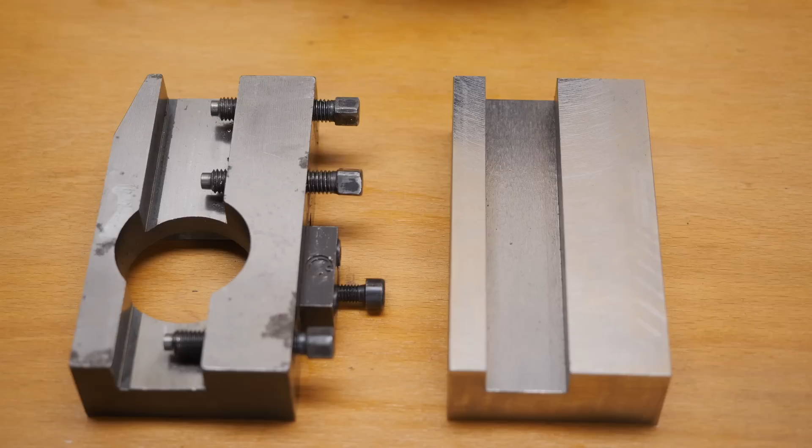A couple of the tool holders which I'm making need big holes in them. Now they're not super critical, so I could just spiral mill them. And from the size, I could also just bore them with my existing import boring tool.

But wait, what's this? This Narex VHU80 needs a 40 taper shank. I've got a slug of steel to make the shank, and I've also got a bar to make the differential stud to pull them together. So I think I'll make the stud first.

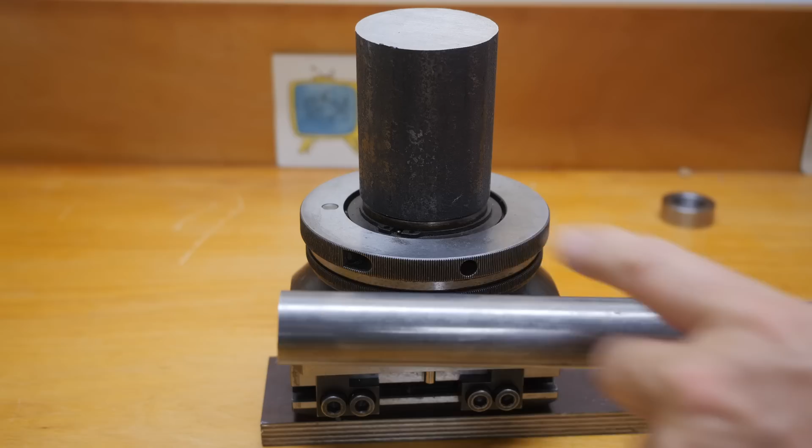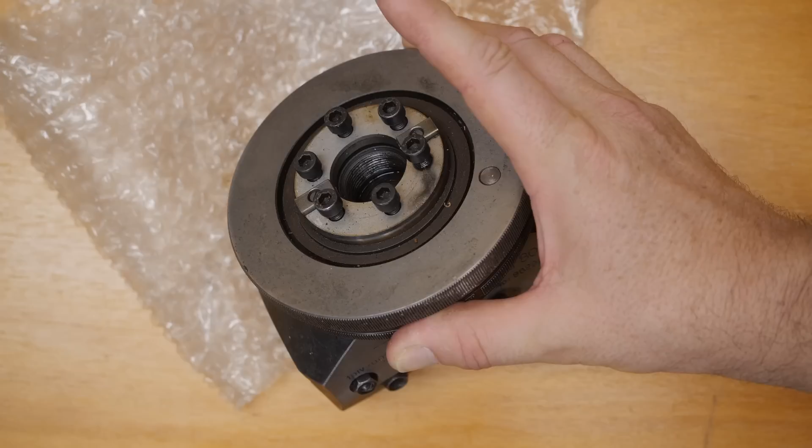Mail time. Man, what have we got here? Well, I thought you could do with a decent boring head. Ah, man, this is fantastic. So this is one of those Wohlhaupter style boring and facing heads. It's called the VHU80. It originally had a Morse taper shank on it, so I'm going to have to make up the 40 taper shank, but luckily they were designed to have replaceable shanks, so that's going to be easy enough.

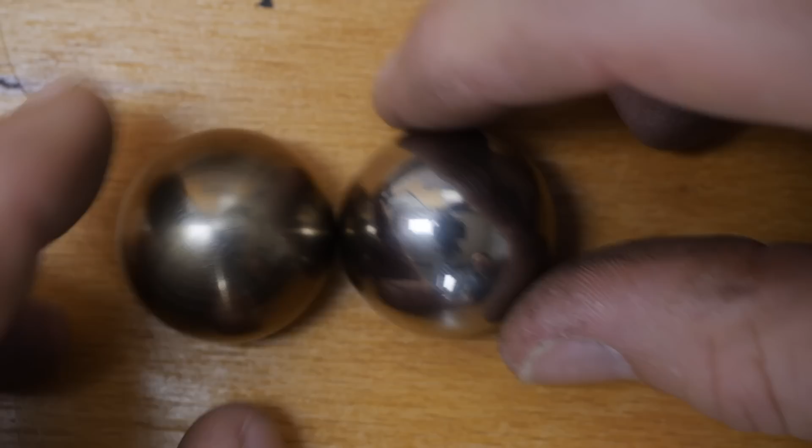Oh, nice. So when I was down in Malta, I saw that Luke was using these ball bearings drilled out with a magnet put in it. It helps keep things square in the vise, really. So for something like a cast part or something that's a bit rough, just magnet this onto the vise and it gives you a single point of contact to press against the part.

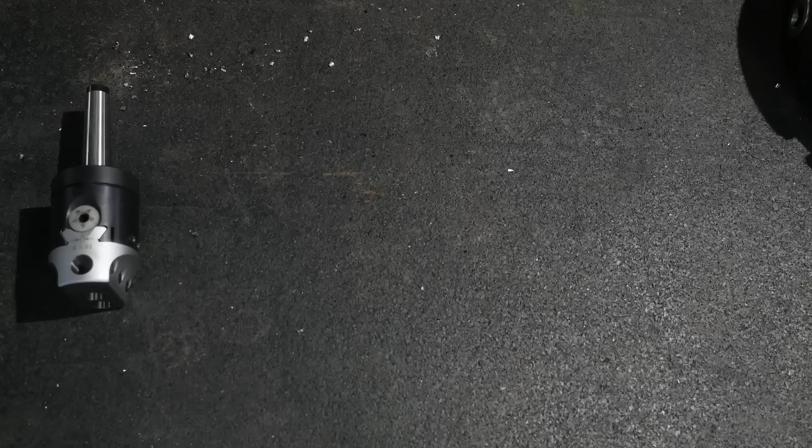Thanks a lot. I really do appreciate that Luke sent me this facing and boring head, because he's already got a Wohlhaupter and a D'Andrea, which are the most sought after versions of this.

Now, seeing as it was made in Czechoslovakia, that kind of reminds me of my favourite Sopranos scene. I'll leave a link.

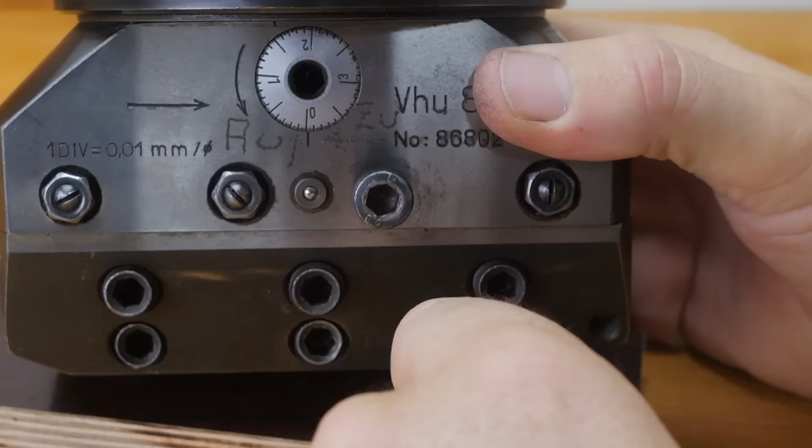And Czechoslovakia hasn't been a thing since 1993. It's got to be at least 31 years old. There's no obvious damage to it. There's only very, very mild signs of a bit of staining or light corrosion on it. You can see no obvious scratches or gouges in the corner where it might have hit anything. And apart from somebody writing some notes in it with a vibro pen, German for open and close, it really is in great shape.

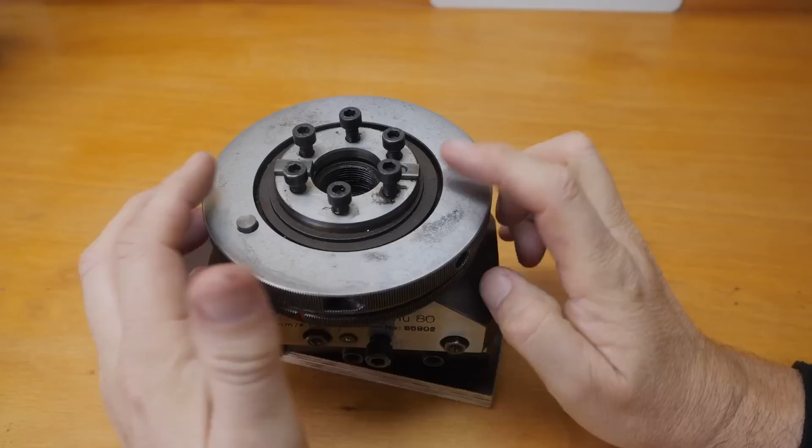The manufacturer, Narex, is still around. They've got a very good website with very clear access to the manuals and spare parts catalogue and all that sort of stuff, which is great. I'm obviously going to have to build a 40 taper shank for it. The way Narex mounts it is with this bolt pattern. They mount a flange, and then on top of that flange they mount the 40 taper, but with a much extended skirt of 110mm diameter with 4 bolts through into that intermediate flange.

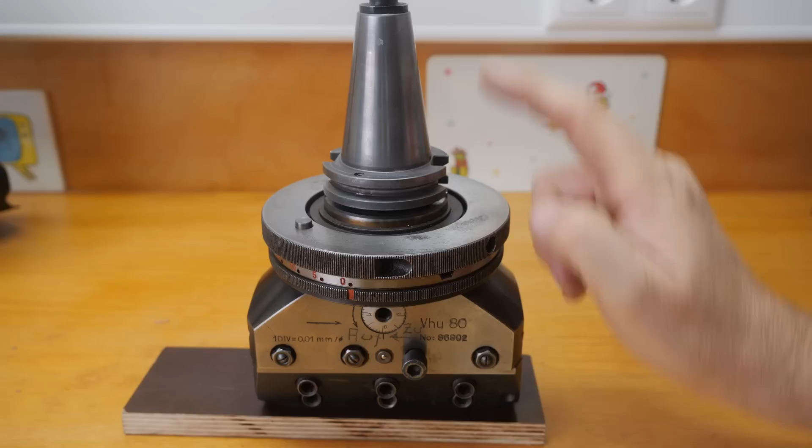And at first that was what I was going to do as well. But then Luke pointed out there's a thread in here. And he'd obviously been watching videos. Wohlhaupter mounted their tapered shanks by using an internal thread. And since you can never have too much clearance vertically on a mill, it's really quite attractive to make up a 40 taper shank that mounts like Wohlhaupter does.

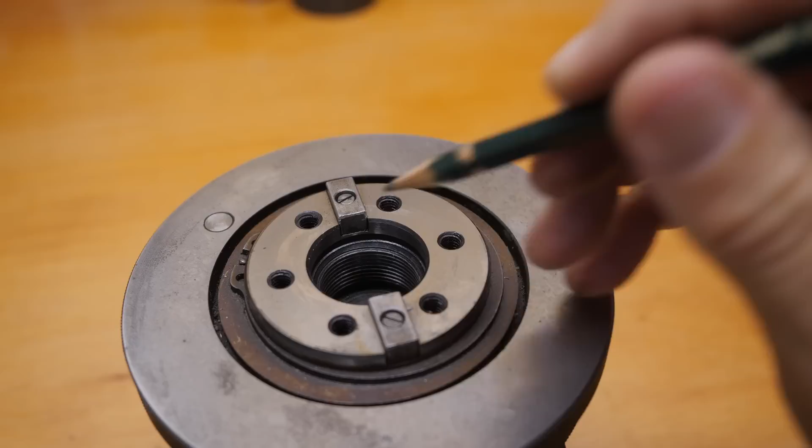To do that, because you can't screw it all the way down with the keys, I'll have to use a differential screw. Wohlhaupter used 16mm thread on one end and maybe a 20mm on the other, something like that, with 1.5mm pitch and 2.5mm, giving the 1mm differential pitch. So I'll use the same. You can see there's a centering boss here that I want to use. And just make up the 40 taper spindle, taking the normal pull studs on the one end with an M28 by 2.5 non-standard thread on this end to match up with that differential stud.

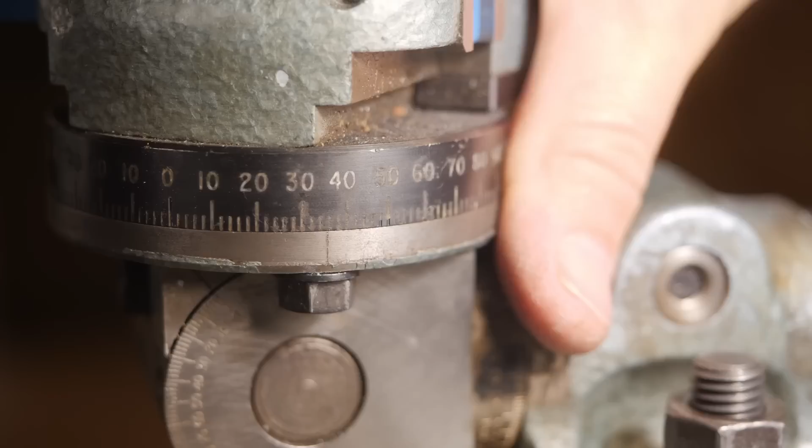I'll cut the threads with this brazed carbide lathe tool, but it's got a nasty chip out of it from its last use, so let's go and sharpen it. About 7 degrees should be enough. Now, grinding carbide is supposed to be really bad for you, the dust, so shop vac.

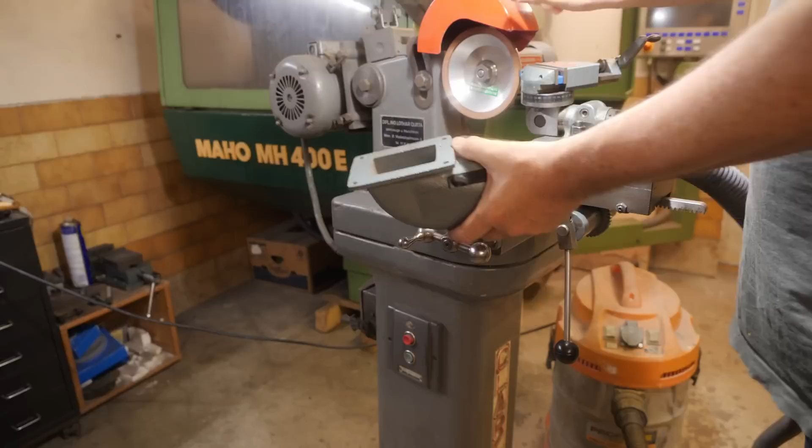I had been taping this hose to sort of a funnely thing, but I've decided to 3D print something, be a little more permanent, a little easier to use. So this should tide me over until I've got my new dust collecting wheel guard finished. And even with the shop vac, I also wear a dust mask.

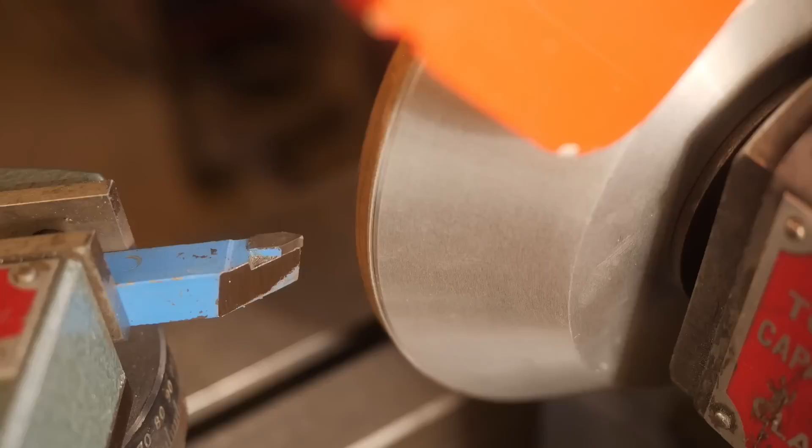Nope, that tip's still not quite there. Got one of these sort of diamond hones, so I'll just give it a little bit of a dressing up with that. And just also round the tip just a little bit. So what's that now look like?

So these are like the original ground sides as they came from the manufacturer. How does that radius on the nose look? Looks like I've broken it a little bit. And then the side I reground. Got a wee bit of a facet going on there. I think that'll be fine.

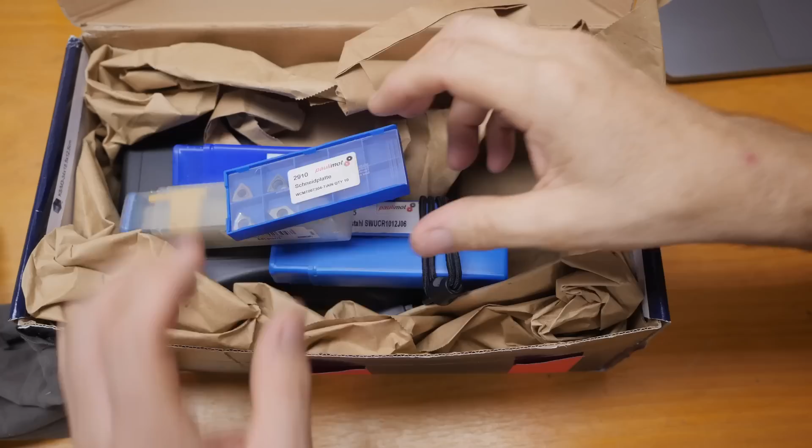Mail time. Alright, rags. Excellent. I didn't have enough rags. Oh, wait. There's more than rags. Excellent. So after Christian gave me some CBN inserts and I used them to turn down some high-speed steel, he said he found another one with a smaller nose radius and sent me that to try out as well. And also, it looks like some of those, what are those, W shapes? Don't have any holders for them, but what do we got here?

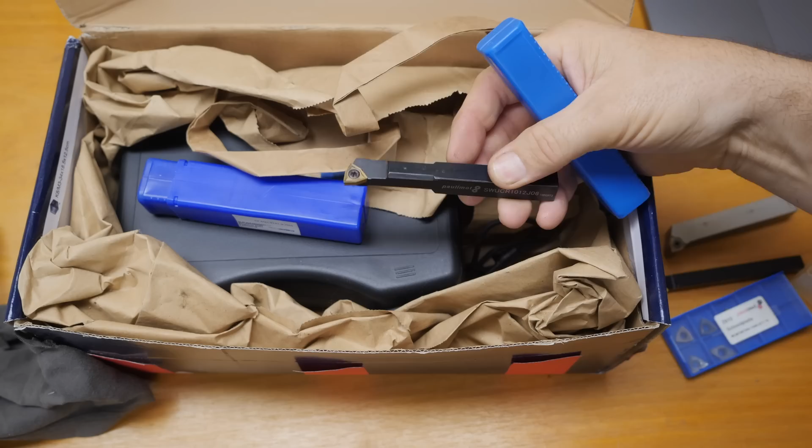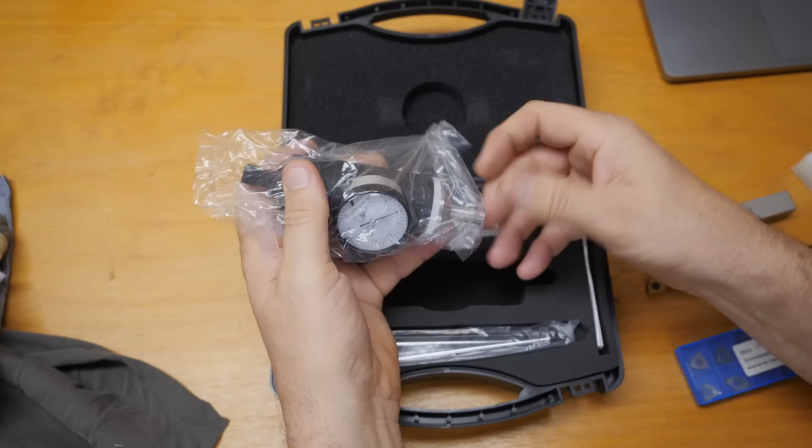All right. Brilliant. And the matching boring bar. Thank you very much. A similar, slightly heavier boring bar. A 2-insert end mill. But the star of the show, he somehow managed to end up with 2 of these centrifugators, or whatever they're called. Center finders. And offered to send me one. And I've never tried one of these out, so I really appreciate it. So these ones you can just hold the tool steady and run the tip right around to sweep a bore and therefore touch off. Thank you very much, Christian.

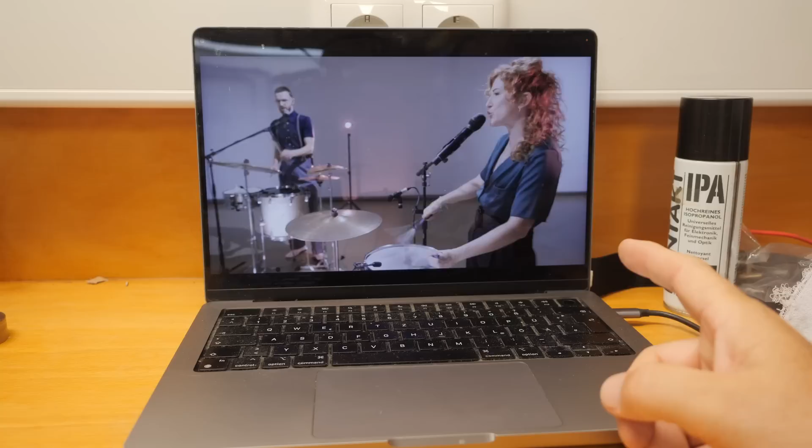That's brilliant. Got positive feedback on using swing music in my last week's video. That was inspired by seeing Marina and the Kats opening for Calexico. I really like the setup with splitting the drum kit between the lead singer and the drummer so that the two of them are sort of both on the kit at the same time. It's a very cool groove they've got.

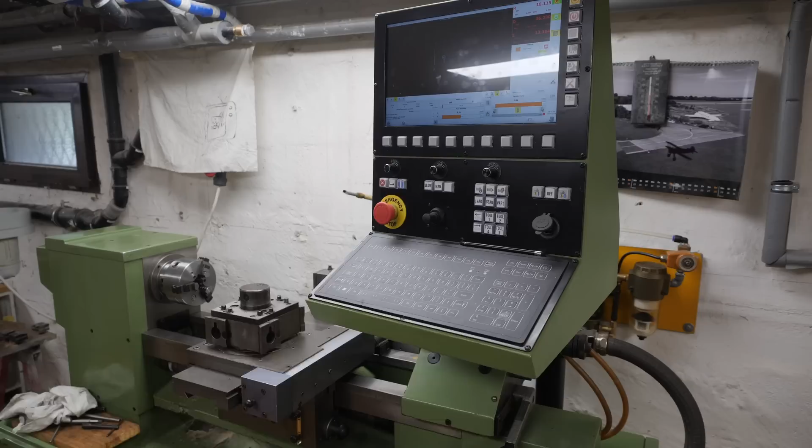Right, let's go to the lathe. So this is a 30mm bar. It would fit through the spindle of my lathe, but the lathe's currently got the collet closer in it. So let's pull the collet closer. Luckily that's also really easy on this lathe. Simple as that.

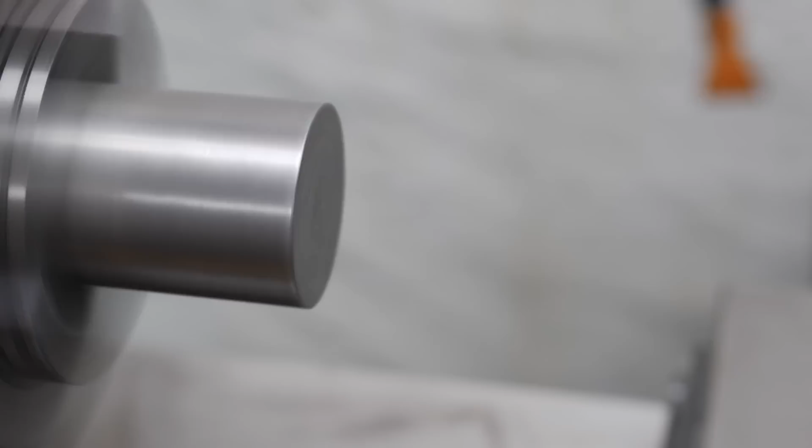Okay, so this here is 30mm bar. If I just chuck it up, it turns pretty straight. This is a very nice 3-jaw chuck. But when I inserted it right through the spindle bore, I got a lot of run out. And I could see here that with it lightly chucked up, this jaw is not gripping. Inside the spindle, there's a key, which this slots into, to prevent rotation of the collets while they're being tightened up. And that key is what stops the 30mm stock going right through.

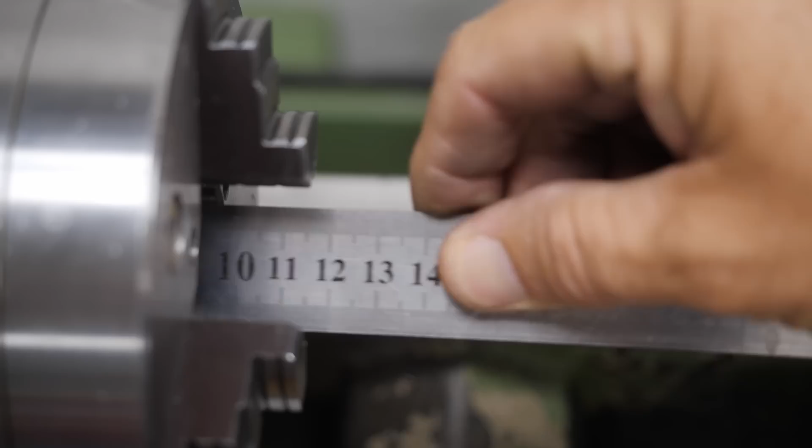Right, it's not a real deal breaker because I've got about 120mm to that key. And I'd already started designing another tool, which I needed 120mm offcut. So I'll just chop this once at 180. The stud I'm making is going to be 60 long. And then once that's parted off, the rest can be used for my next tool.

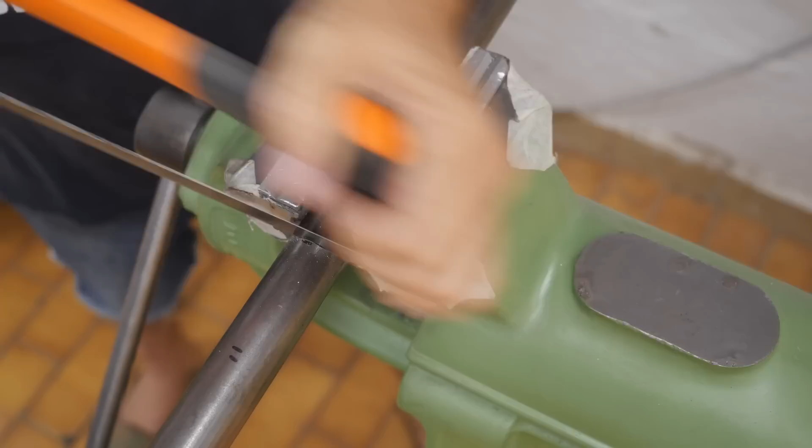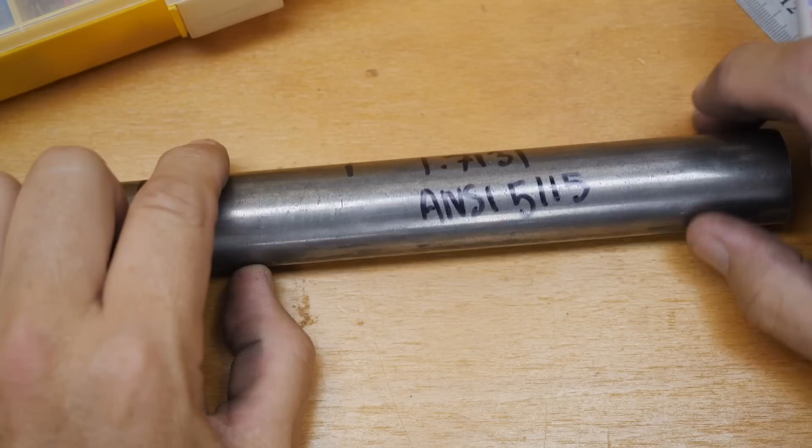You might be wondering what sort of steel I bought. It's EC80. That's also known as 16MnCr5, 1.7131. And in the ANSI world, they call it 5115. So this is a steel that's designed for case hardening. I don't know if I will case harden them, but if I do, at least I got the right steel for it.

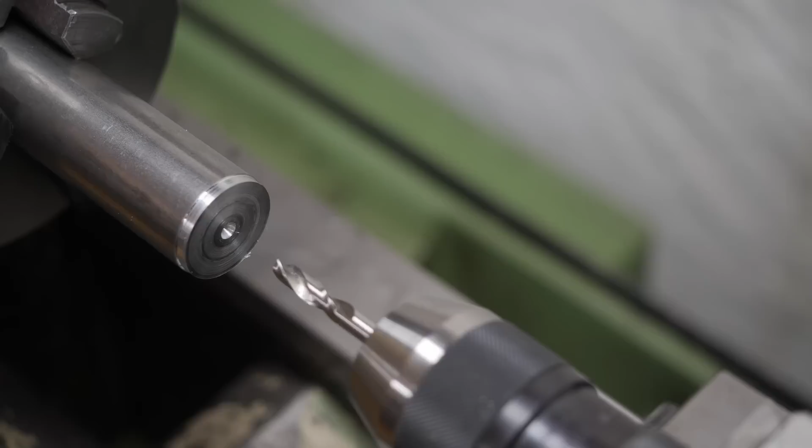Now the first thing I'm going to do here is put the hex into the end of it. So first I'll center drill. I probably should have ground a flat on this for wrenching, but I don't think the rotational loads are that high. Man, that fit is awesome. This is the surface I hard turned in a previous video. It's a high-speed steel.

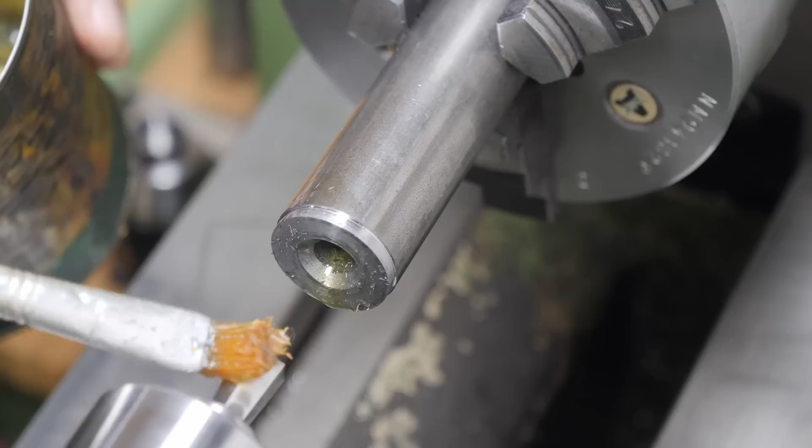Okay, so now we're coming to the bit that's caused me a lot of issues in the past, rotary broaching. This is a pretty large broach, a 10.2mm broach for a 10mm Allen key. Luckily, being a 6-point, the individual points are not quite as much material to remove. I've had problems in the past when doing square broached holes where the corners are just so far out, you have to remove so much metal that I get into trouble. But let's see if this works.

How does it look after the first couple of millimeters? Well, so far so good. I've still got the corners on my broach. Yep, still cutting nicely. That's about 4mm in. I want to go in about 10. And it looks like my broach still has its nice sharp cutting corners.

Okay, well that looks like it went easy enough. It is reasonably loose, but we've gone in a decent depth. Seems to be cut nicely. So let's call that a day. Start doing the threads.

There's very, very slight dulling of the corners, but I got a feeling that I might not have quite caught them when I dished the end, so that might not be anything new.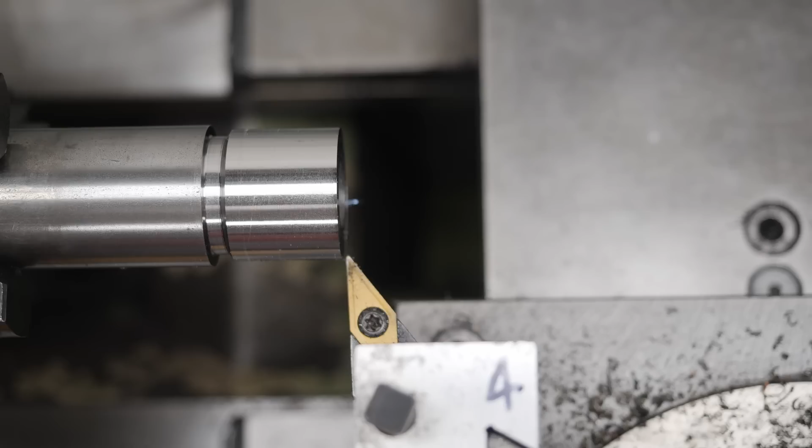So, where was I? Ah yeah, turning the differential screw. So I've already made up a gauge just to test this thread once I've done it. This end's actually going to get a smaller thread, the 24mm 1.5 pitch, but I'll just do this thread on it first just to dial in this tool, since I've set it for the first time.

The reason I switched to this tool instead of inserts is because I then want to do the second thread in the same setup, and this way I can sort of reach in behind the alignment boss here and cut both threads.

I put the wrong Z dimension in, so I stopped a millimeter too short. I have to recut that, and it's a bit too tight, so let me just reduce that diameter a little. Okay, it's not the greatest tool, it's a bit rough there. I'll just give it a good wire brushing.

Yeah, I definitely get nicer, smoother threads with the threading insert rather than with the brazed tool carbide cutter, but hey, it'll work. Right. Just offer up the real one. Oh, that's looking great. Okay, with that dialed in, I can now just turn this thread back off.

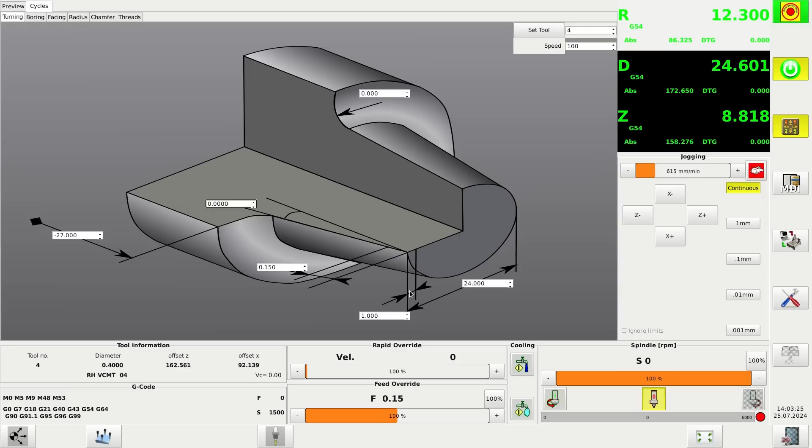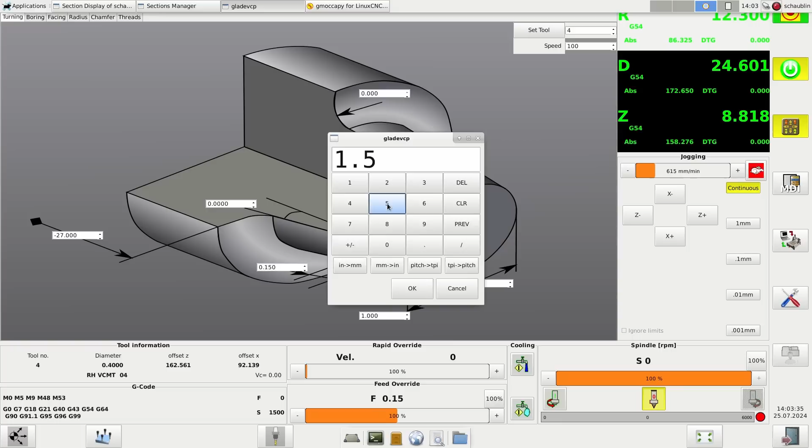Okay, that was done. I thought I was adding an end radius, which would be up here, but I wasn't. I put a taper on, so let's clear that. Don't want a taper, let's put a radius on there, which I don't really need for this first part, but I want to see what it looks like. I'll need the radius then when I do the thread undercut. I really love CNC for those blended radius moves.

This coarse thread really takes quite a large number of passes to cut, but that's what CNC's for. So it's looking pretty rough as I expected, so I'll just run the toolpath again to try and clean it up a little.

Next I need to make a relief groove here. I've just realised that although I've got a bunch of different right hand turning tools, I don't actually have a left hand turning tool, which is what I would need to cut that relief groove with the radius in the right place. So I think I'll just do it with a parting tool, and there won't be a radius on it, but oh well.

There's really quite a pucker factor when you're working this close to the chuck. Just double check, I want to head to minus 63. I'm currently at minus 38, 39. Okay, that's correct.

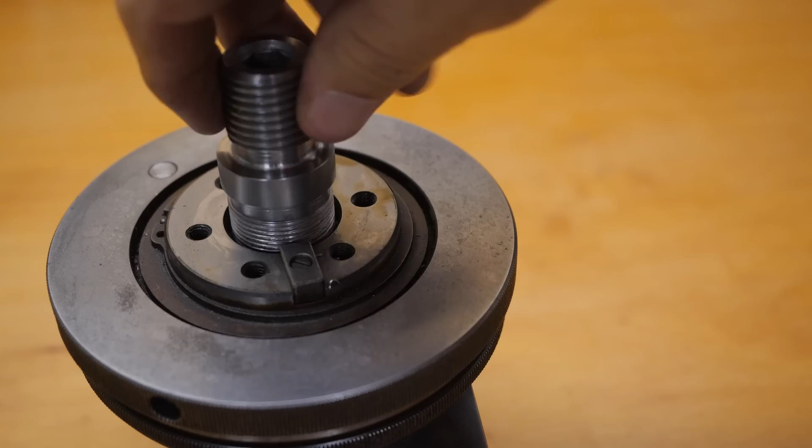Right, does it work? Alright. I wonder if this is how Mr. Whitworth felt the first time he took a bolt out of assembly A and put it into assembly B and it fit. Woohoo! So it's bottoming here. I'm going to need to turn it out 2.5. That's 1.5 turns. And you can see that the alignment boss is no longer down in its bore, so I need to shorten the whole thing.

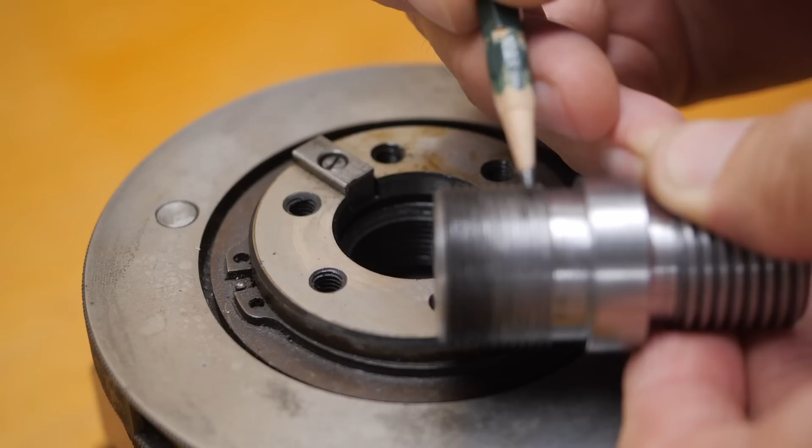My understanding is you only need 6 full threads of engagement, so 1, 2, 3, 4, 5, 6, and I've got about 1, 2, 3, 4 extra. So there's about 10 threads in there. I'll just shorten this down a bit.

This material was already at 30mm and was reasonably close tolerance. The surface finish isn't great, but I just polished it up so I can keep using that boss. That's it screwed right down. That's 1, that's 2.5. So now that centering feature will bridge between the two parts.

Right, with the differential screw now finished, it's time to go on to the arbor. I'll have to just work on keeping that chipping because the swarf that's coming off is so strong you can't safely remove it.

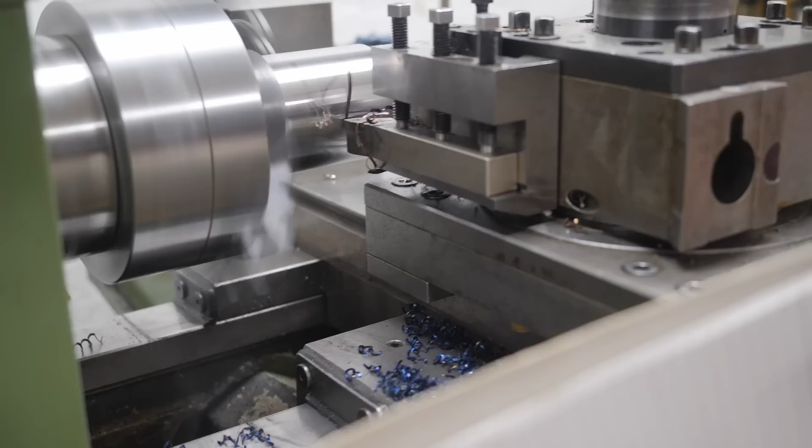I guess theoretically I could do this with 2 setups, but I feel more confident doing it this way. I'll do it with 3. So the next thing I need is a 14mm hole through the middle, which is the tapping drill for M16.

Right, so lathes, being a Z X-axis machine, have a native orientation of G18, which you can see down here. But to use pecking drill cycles, which are sort of standard to LinuxCNC and I guess all controllers, you need to put the machine into the G17 mode, which makes it effectively like a mill. Obviously there's no workable Y-axis, but once you've got it in G17 mode, you can peck drill with the Z-axis, which is what I'm going to need for this deep hole.

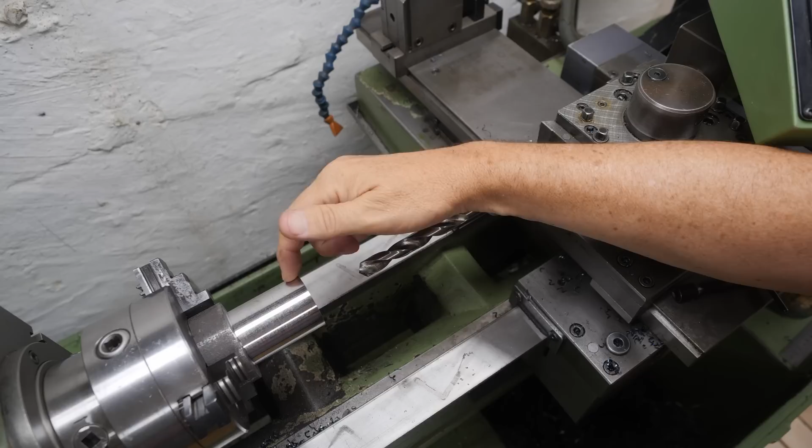That's definitely not good. It's moved about in the chuck. Luckily the first bit of that hole is a counterbore to center the pull stud. Thinking about it, since that's now wonky, I don't want to do the counterbore based on that wonky bore, but since I'm doing this in 3 setups anyway, I guess I can already flip this. I was going to drill through and thread from this end, but I guess it doesn't actually matter. And if I flip it, I've then got a nice flat surface.

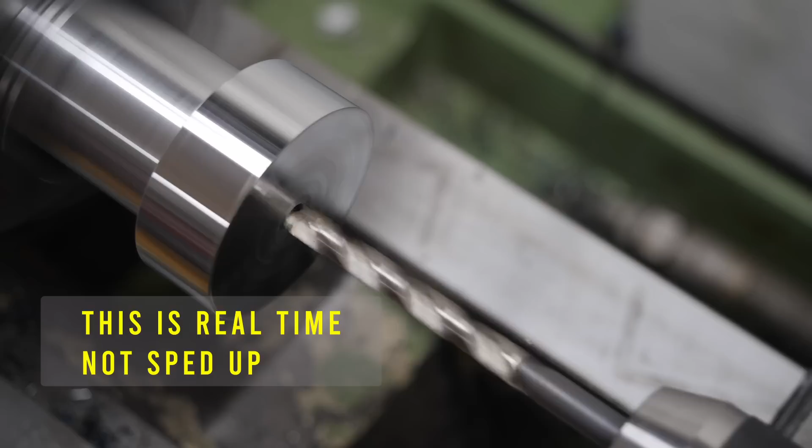The reason that would have moved is because the end wasn't sawn square, and once the pressure came on it, it probably lined itself a bit better. But let me have a think about this. Ah, shit. I was in G95 mode, which is distance per revolution, so I tried to make it move 70 millimeters per revolution. Ah, that was such a nice brand new drill donated by one of my kind supporters. Well, I'll have to chop the end off that and resharpen it.

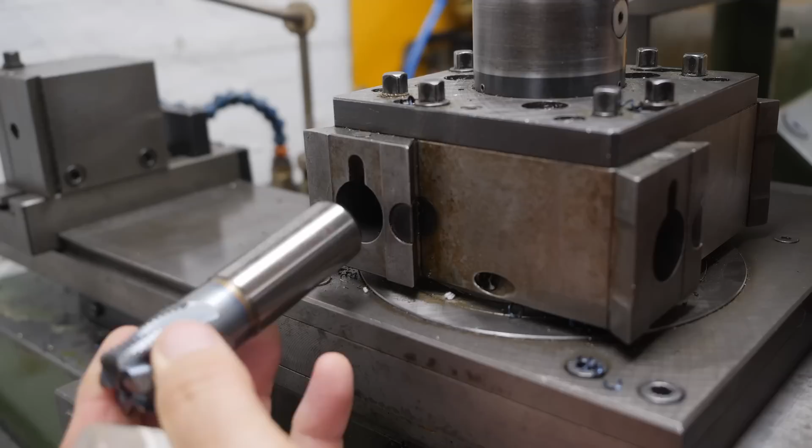Right, next I need to get rid of that mess, sharp bits and stuff. I think the easiest way to do it might be to use one of these 25 millimeter end mills, because they can mount straight in here. And that way I can just take it down, make a new flat bottom, because the way that one tooth crosses to the center, this must be a center cutting end mill. It must be pretty complex to program the sharpening of these things.

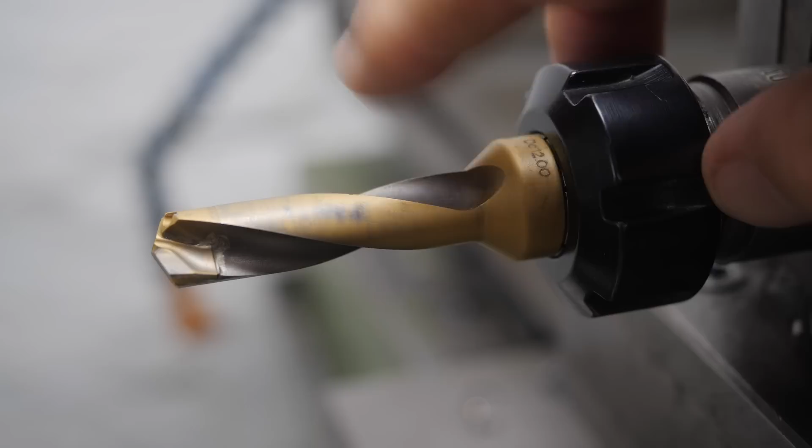I'll put that down as not a great idea. I hope that this will be a better idea. This is a cemented carbide kind of stubby drill. Let's see if that can clean it up and make a straightish hole. So how far did this get knocked out of alignment? And how much can I improve by just turning it to a fresh spot on the 3-jaw? Nasty. At the latest, when I come back from milling, I was going to have to do this anyway, so it doesn't really matter.

So there we have it, the beauty of CNC. Poking a 14mm hole down a piece of stock, a task that would have taken me all of a couple of minutes, maybe 10 on the manual lathe. But with a CNC, you got no feel. You make one tiny screw up of feed rate mode and everything turns to custard. Yeah, great for production, but for one-off stuff, you've really got to be on your ball. It's so easy to make a mistake.

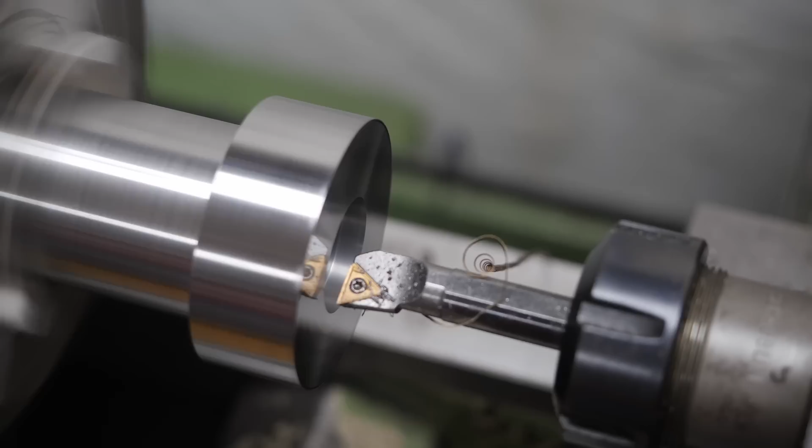First I'll do the little 6mm deep 30mm alignment boss. I'll just take a cut to 22mm diameter first, just to mic it and make sure that this tool is actually set correctly. I was getting crappy surface finish, so I took a closer look and saw that my insert was chipped. And for this last couple of passes, to get a nice smooth bore, I've put in a high positive rake angle aluminium cutting insert. Those give a pretty nice finish for this sort of thing.

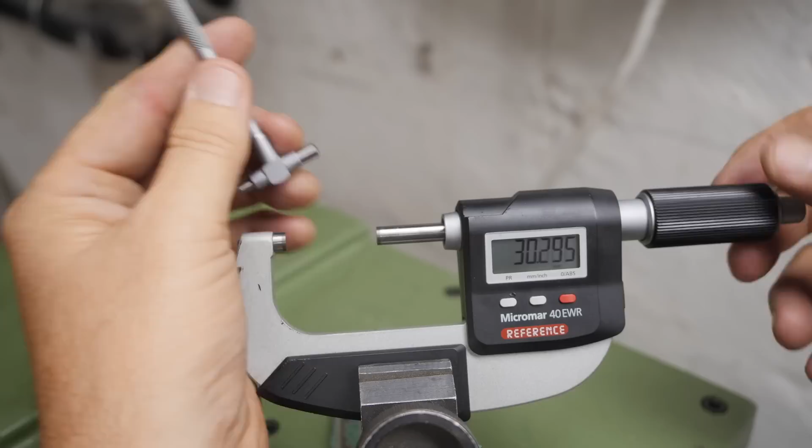Well, that looks about right. Very slightly oversized, 6 microns. I've done that measurement a couple of times. It seems reasonably repeatable, so that's exactly what I want. I finally got around to getting a stylus so that I can get up and actually touch the cycle button. Because I didn't put a bevel on this bezel, I can't get up and touch that with my fat finger.

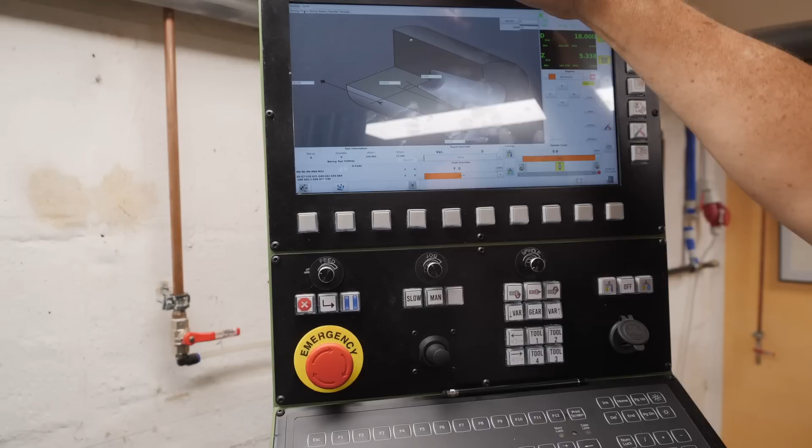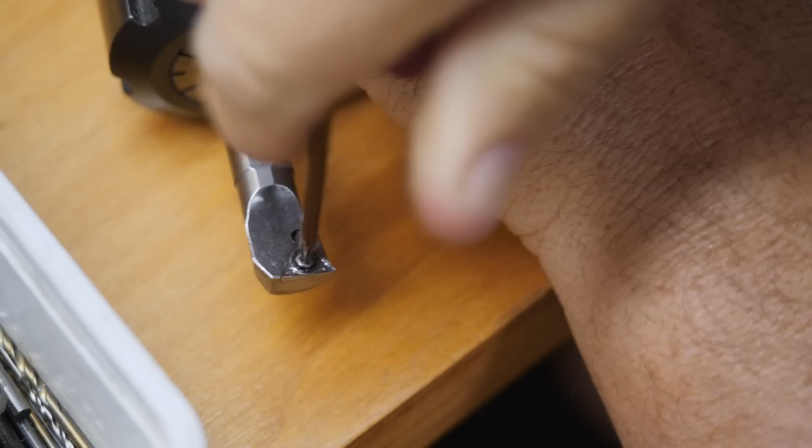Need to bore out the clearance for the M24 by 2.5 hole. So therefore we've got tool 6 set, we've got speed 70, that's been working for us. I'll just go up to 20mm to start with. And we need to go back to -35. Right, no point doing this with an aluminium finishing insert, so I'll switch back out to a normal insert for steel. And next the chamfer on the lead-in.

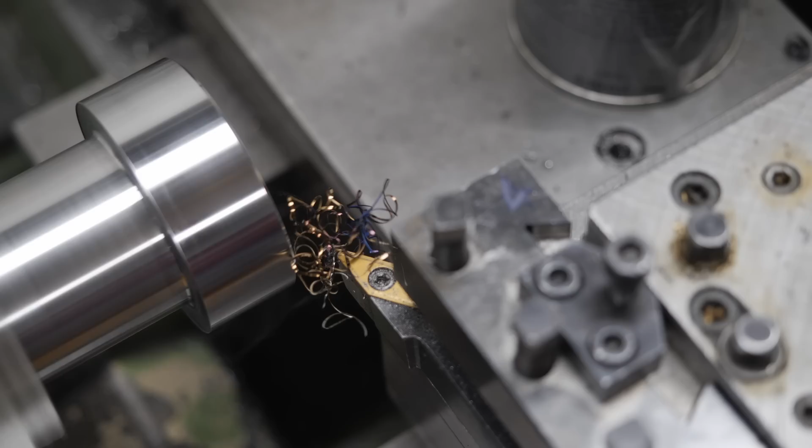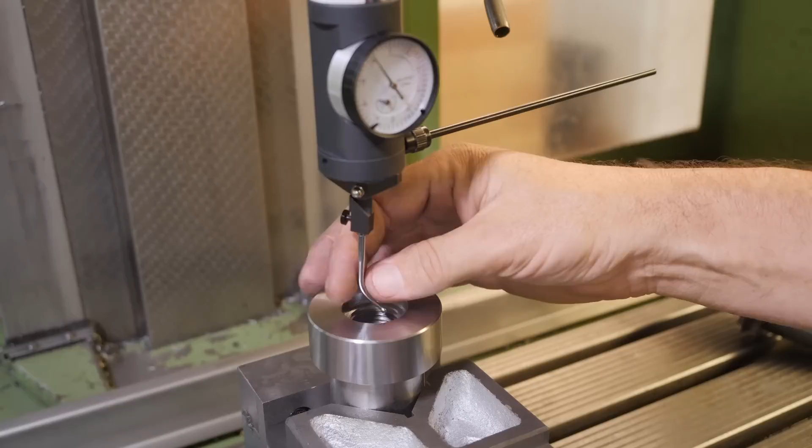Well, that finishes off the lathe portion on this end. So now let's transfer to the mill. Dialing in a round part is the perfect thing for trying out my new center finder. I need the probe pointing out the other side. Yeah, that should work.

I think I'm a little fast there, aren't I? And too low. Should be there. Oh. Maybe I didn't have it tight. Now that's kind of cool. So I just zeroed my X and Y. And the tool length I can dial in against a known diameter bar, in this case 10.5 millimeters.

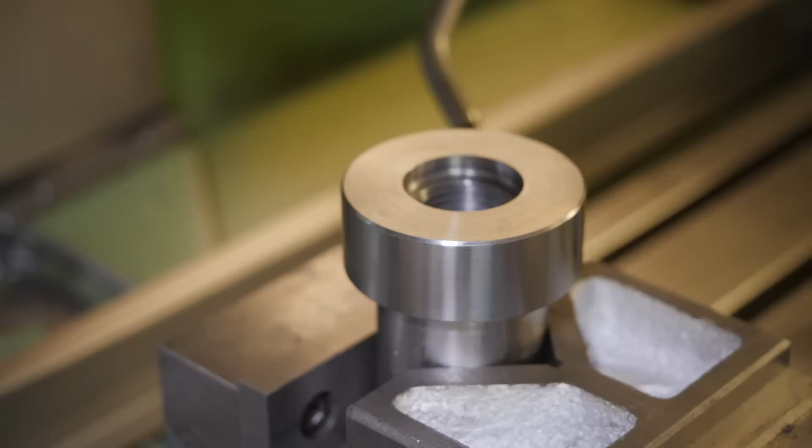Hold on, it looks like one of my main spindle contactors is not closing. And I can hear the 24 volt relays closing, but the spindle contactor is obviously not closing. So I don't think this area's got any problems. These are the main spindle drive, left and right. So the left and right is not the issue, it's the on off of the spindle. So it must be one of these contactors up in this row, I'm guessing, is just not closing. I guess I'm gonna have to pull the machine out, just have a look at which contact is sticky.

That's a real bummer because it's already Saturday lunchtime. At the latest, I'm gonna need to start editing this video in a few hours time. This is the sort of issue I really don't need because I still have to do the slot this way, the drive lug slots this way, and then put it back in the lathe, do the taper, do the M16 pull stud thread and its counterbore. So wish me luck. I've really been doing my best lately to try and do finished videos rather than, you know, episodal things for reasonably simple projects, but sometimes it's really challenging within the scope of a single week.

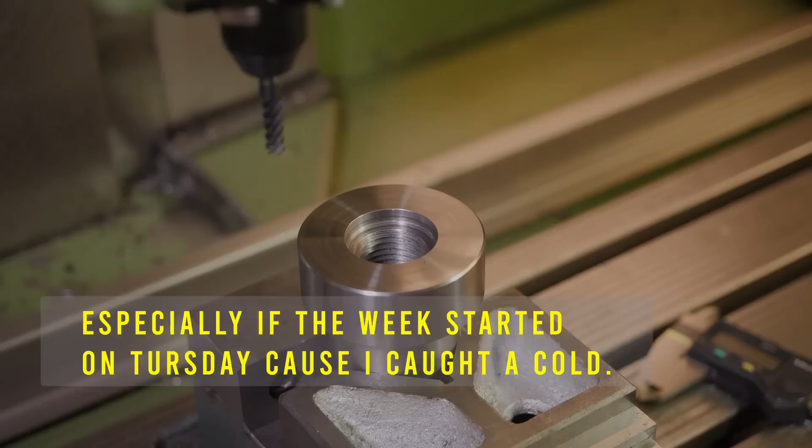Well, I just rebooted the machine and it's working again. Just did a test cutting air with this, so let's give it a go. So the key that needs to fit into that slot is 8 millimeters, slightly below. Now the key is only 2.5 high, but I'm cutting this to 3. Because cutting slots is so common, I've got a little macro I've written, which is really easy to adjust the depth, width, and length of the slot. So at the moment I'm cutting undersize. Yeah, that's at the moment 7.41, and I want to aim for 8 with maybe just a smidgen over.

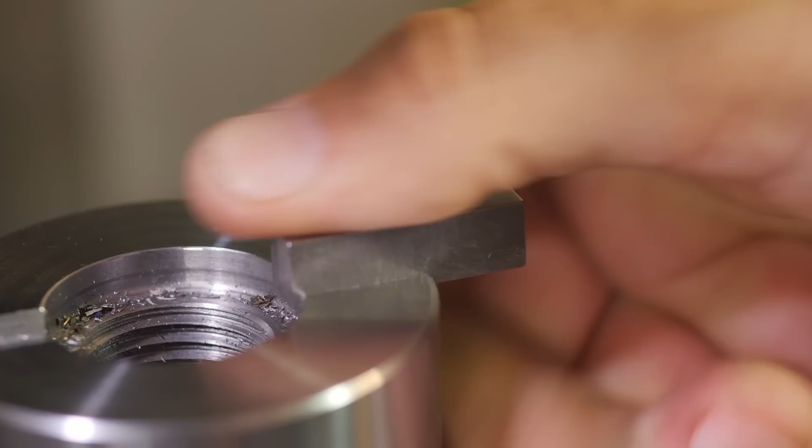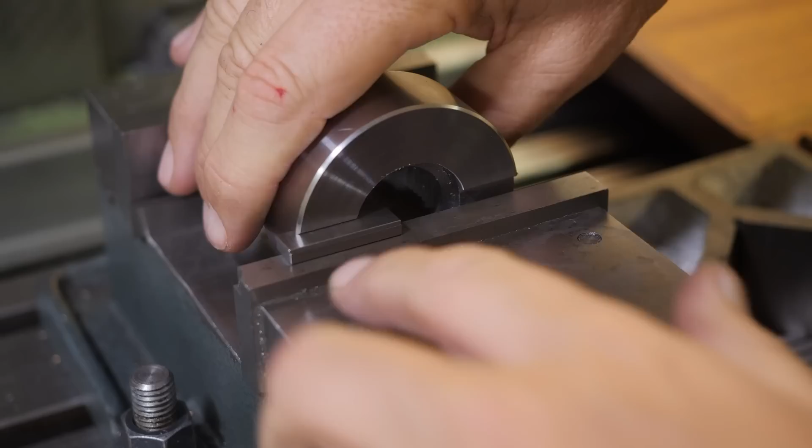Just sneaking up onto it there, so that would be 7.91. So here's the 8mm gauge block. Yeah, it's a nice firm fit, that's for sure. Let's check it with the real thing. Oh yeah, that fits. That's a lovely fit. That's it for this setup. Next up are the slots in the sides. Right, found a gauge block stack to split the difference there to get that nice and level.

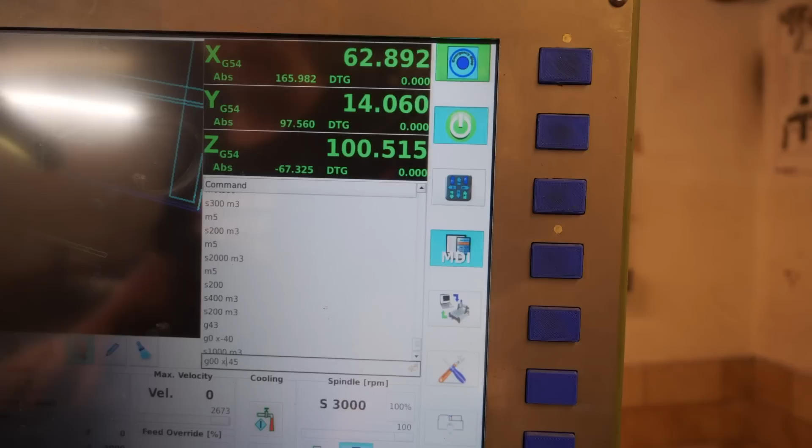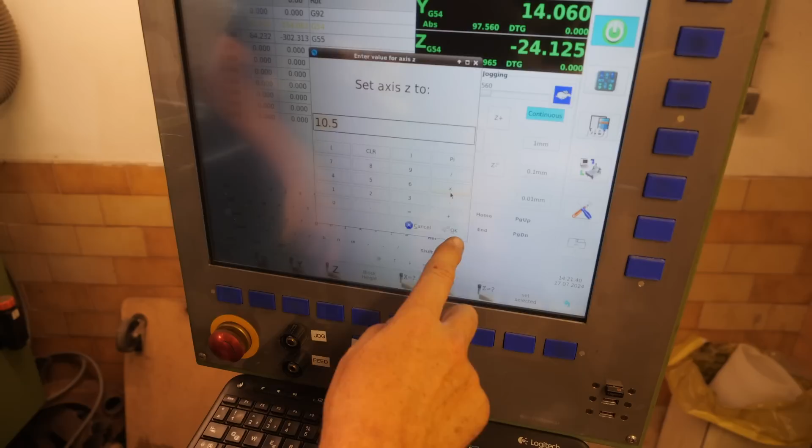Let's find the center of this part again. And these things really are easy to use. So we're at Y0. So now zero the X. I guess that second touch off is not strictly necessary, but we're measuring slightly under the 63, like a tenth under. So it'd be a G0. Go to X 31.45. I think the batteries are getting flat. I thought I put new ones in. So that's a 10.5mm carbide blank. And our offsets are done.

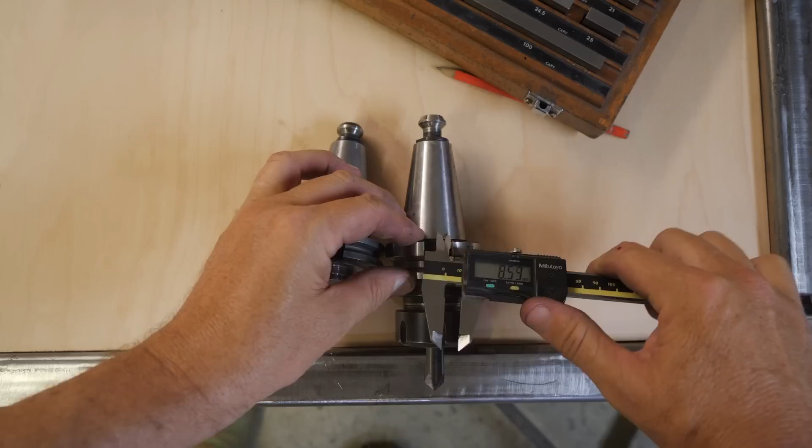I use a mix of SK40 and BT40 tooling. The differences are the location of the gripper groove. The actual tapers are the same, except one of them's longer. The SK40's got a 2mm longer taper than the BT. So therefore you end up with different pull stud lengths. And I just measured those slots I need to make. Nominal 16, they're 16.2 on the SK and 16.6 on the BT. I'm guessing they loosened up the tolerance there to reduce the number of misloads for automatic tool changes. It's not really relevant for me. I'll just do the 16.2.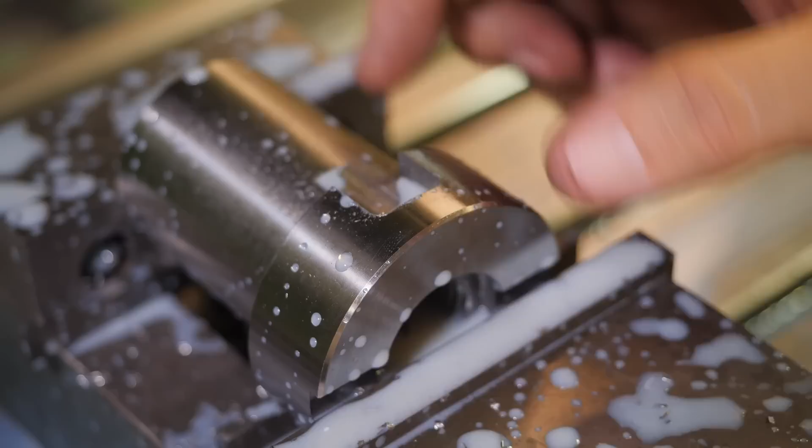Oh, I didn't think about that island in the middle, did I? I just remembered that I only roughed this in just enough so I could hold it. The taper actually comes down another 7mm, down to here somewhere, so I need to cut away more of this. The BT standard ones also get cut down quite low. Ah, that looks stupid. I'll just cut them right through like the SK ones are.

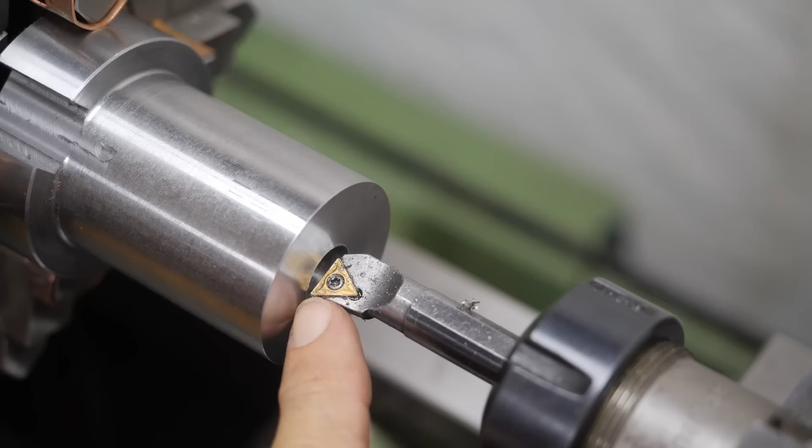Well, that's the milling finished. Now we're flipping it for the last few features on this side. Let's keep our fingers crossed. I need a 17mm alignment boss for the pull stud, and that's pretty marginal with this, my favorite boring bar. But I'm just going to have a look at it because I think I can make this work by doing it as a facing pass, taking lots of small depth of cut passes.

Nope. No, there's not enough clearance under here. Let's hope we have something in the random lathe tool drawer. Oh, right. This is a carbide boring bar, left hand turning, but otherwise that'll be perfect. This is set at the right height, so what do we need? We need 55 millimeters.

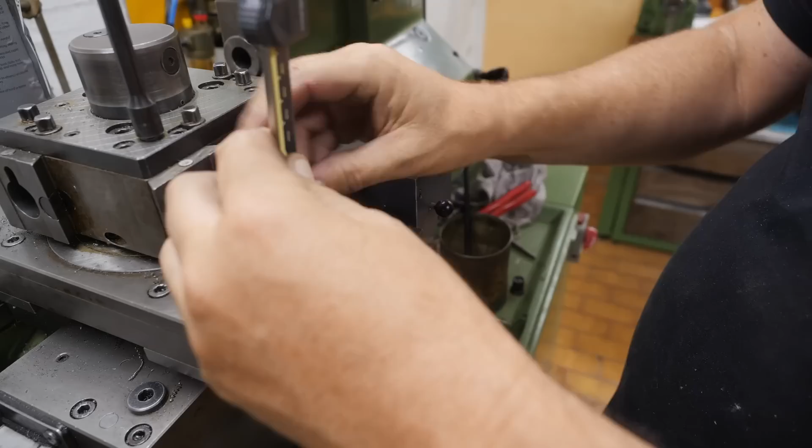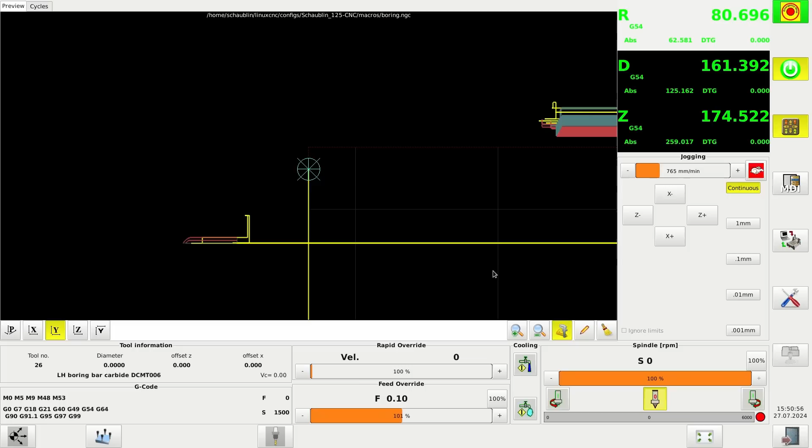Okay, let's add a new tool. Let's give it the number, twist drill, all that center stuff I'm putting in the 20s. So let's call this one 26. Click OK, followed by an error. Obviously it doesn't like having the tool created and then used immediately, but it's 26, it's in there. It has no tool offsets at this stage, but I'll just set it into G43 offset mode. So the next thing, we'll do a test cut and measure it and set that as well.

Okay, didn't set this up so well because I've now got a bit of a nasty interrupted cut to do there. No, it's cutting beautifully. Cool. Now I'm going to use this to cut its own taper because this lathe macro can accept a taper angle.

Got a wee ways to go yet, so I'll keep beating up this insert, and then when I get close to the end I'll switch it out for a fresh one. Right, there's a fresh insert, and I'm going to need a better surface finish than that, so I've cut down the feed rate and also the depth of cut, and I'll add a bit of coolant this time, something to lube it. Ain't that just typical? Kind of a bird's nest on the last pass to rough up the surface finish a bit more.

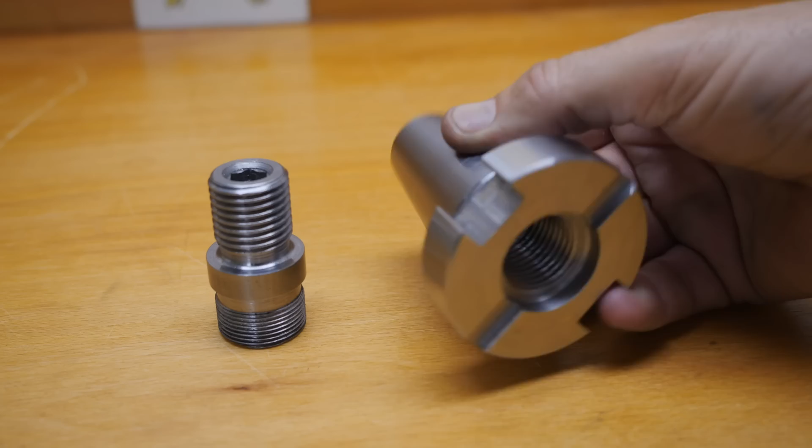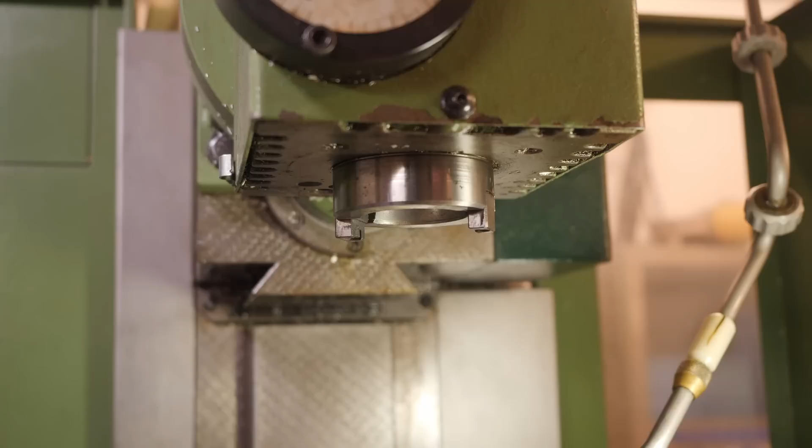Well, that was really quite a lot of work for just two simple components. Pretty happy with how they came out. Not perfect, I made a few mistakes, but I think they're functional. Right, give this a blue up and just see what it looks like in the Maho's taper, Maho spindle. Guess I really need to take those keys out so I can turn it. It's touching quite well at the bottom and at the top. Not sure how much better I could expect than that.

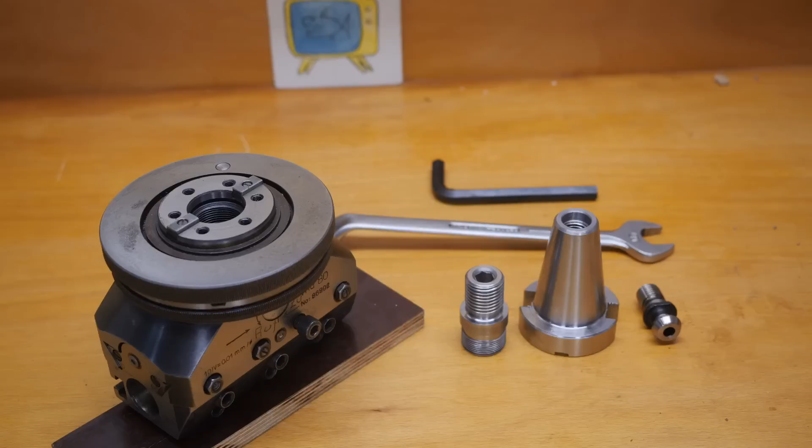I'm not sure how well you can see this, but that's actually a feature of the spindle. See how it's got a band to carry the load at the front, then it's relieved, and then there's a second band further back. So you're never going to get full contact with a Maho spindle. It's only ever going to carry load on two strips. So I'm going to call that a pretty successful taper. Awesome. Let's assemble it. Well, that was a surprisingly large amount of work for a pretty small, normally easy to buy part.

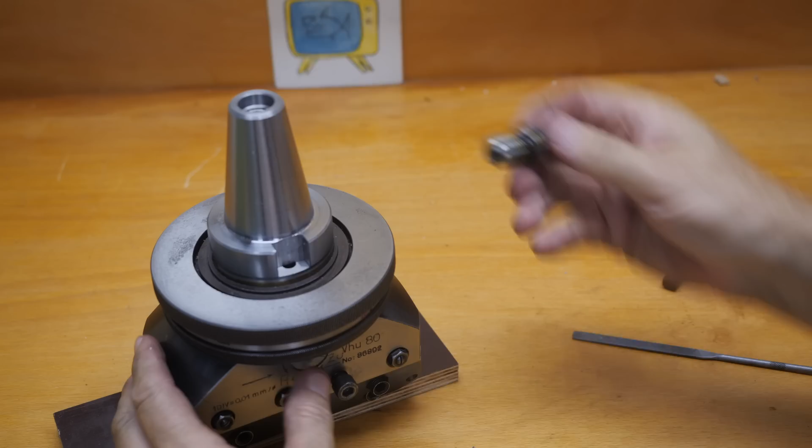So first the screw goes all the way until it bottoms. Just need to deburr those last bits that I cut. Next the arbor screws on until it just about hits the drive keys. And here's kind of the unintuitive bit with these differential screws. Now I back off the screw, so it's winding out of the bottom thread by 1.5 millimeters per turn, but winding into the top at 2.5 millimeters per turn, and therefore it pulls the thing up tight. So these have been known since 1667. Who'd have thunk? Then it's just a pull stud and we're ready to test the thing.

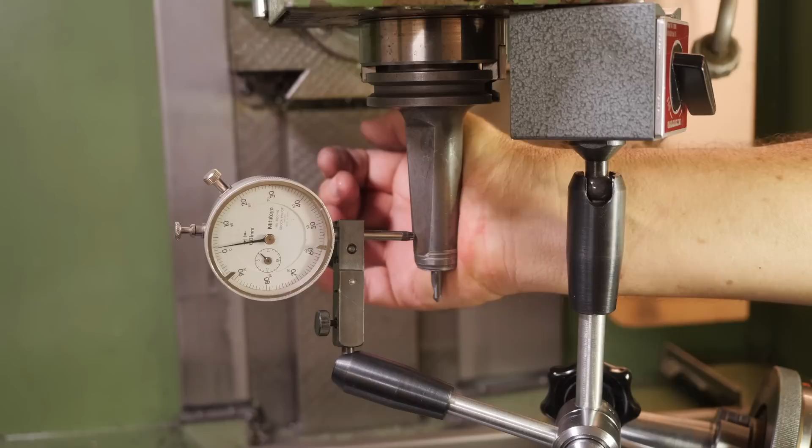Right, very unscientific test because I'm not putting any form of calibrated load on it rather than just leaning on it. But what sort of deflection do you get with a tool of similar length when I sort of lean on it? Get a couple of hundredths of deflection. Leaning on it, I can also get a couple of hundredths of deviation there as well. But it doesn't seem hugely different.

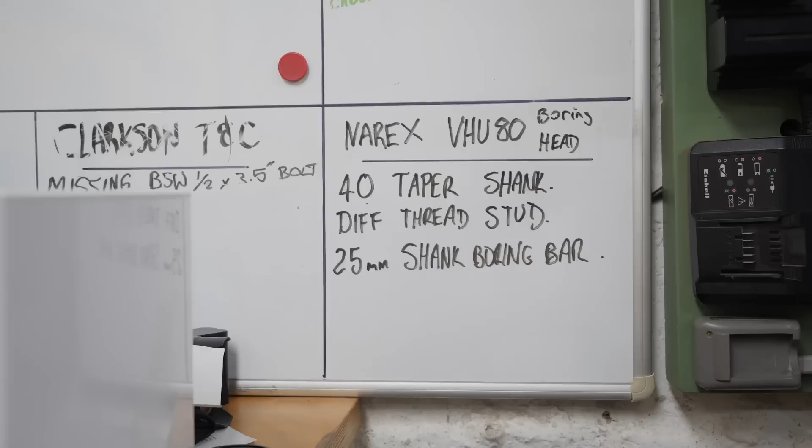Look, unfortunately I'm so far out of time now that I'm not going to have a chance to actually test out the boring head. You'll have to wait for a future video if you want to see this in action. It's a very cool head. It can do both normal, fine adjustable boring, but also can actually flatten a surface or also cut cones. So there we have it. I'm pretty happy with how that came out.